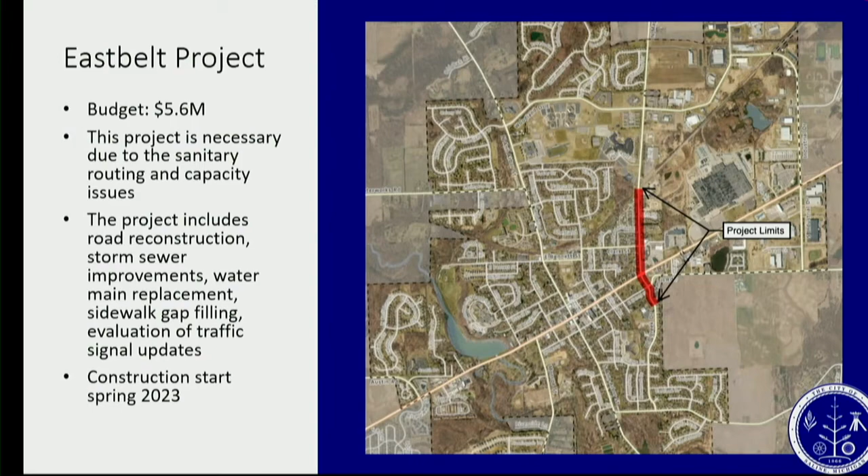The next project on the list is Clark Street, which is directly adjacent to this. Maple and Clark intersect; Maple's north-south, Clark east-west. Clark Street is a project for which we have received about $500,000 in funding, or a little more, from the federal government. And so we're coordinating this. We just started design on this one. This one just impacts a lot of residents. There's a lot of residents that live along Clark Street between Maple and Harris.

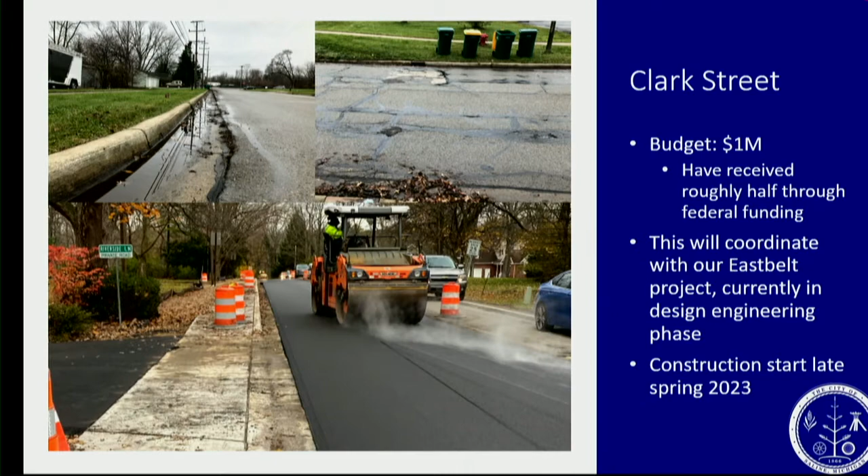Next on the list, and this is one that's actually starting this summer. This is ultimately a storm sewer project that we're doing to reroute some storm and address capacity and condition issues. This is located very near Pleasant Ridge Elementary and will be starting right after school ends in June of this year. We're installing 42-inch storm pipe south along Harris Street and then west along Pleasant Ridge over to Ann Arbor. So this is the route.

This will impact traffic locally. There will be one-way traffic throughout the duration of this construction. We will be hosting a project-specific meeting about this, more specific to this neighborhood, in the coming months because we're getting ready for construction to start here in June.

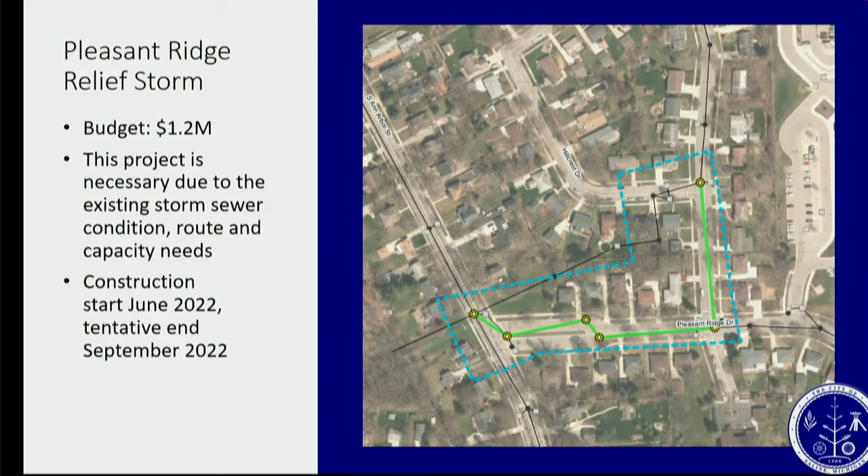Well, just in time to discuss the water clarity topics. There are numerous specific activities ongoing under our broader water clarity initiative. We'll have Director Searles weigh in. Well, since it's on the screen, we'll talk first about the water main lining job on Michigan Avenue. They've taken the old main out of service. They're going to clean the inside up and put a poly liner in that's going to prevent tuberculation.

We also have the valve assessment program coming, where they're going to touch all the valves in the city, give us a condition assessment, and also help us locate anything that we don't have mapped. That's going to be done using a technology platform so that we're getting actual GPS coordinates on all of our valves going forward. That'll help us keep a continual valve turning program going.

We have the water meter program coming, which will put new meters in the houses, but also allow us to keep up-to-the-minute reads, which will help us identify leaks and any issues in the house. The residents can have their own dashboard and control the water from their portable device or desktop, whichever they prefer. The big key for water clarity is it has a communications module.

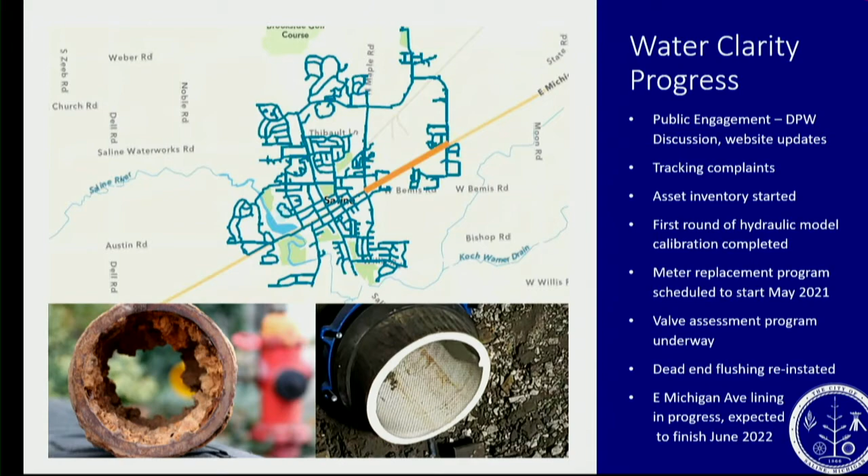On the screen is the map for the initial joint crack sealing efforts for this year. So they price by pound of material, so there may be more added to the map. The joint sealing helps keep moisture out from under the asphalt. The moisture is what hurts us in the freeze-thaw cycle, causing potholes. We're gonna continue this program going forward, well, perpetually. It's just a good, low-cost maintenance to prolong the life of the asphalt.

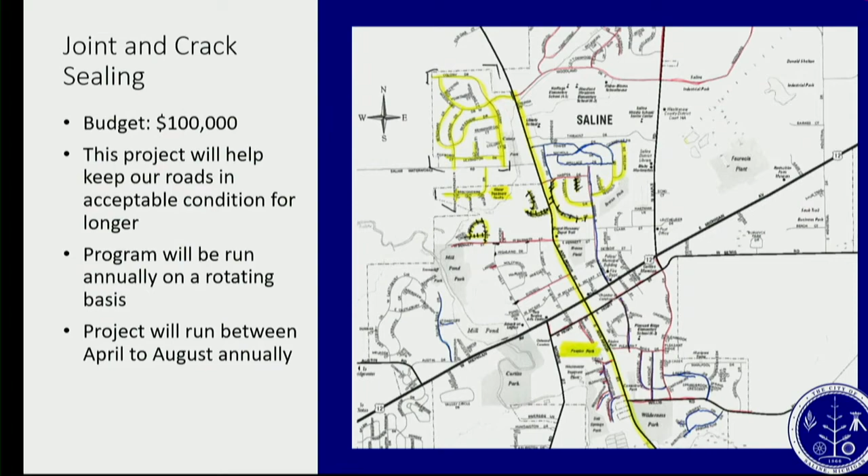I guess I'll talk about this one. This is a larger project that's necessary for the maintenance of our collection system. We have 7 pump stations throughout our project, and a majority of this project is mechanical upgrades primarily at 2 of our major pump stations. But we're also touching, as the screen shows, numerous sites remotely located in our collection and distribution system.

We're doing electrical upgrades, SCADA, which stands for Supervisory Control and Data Acquisition, upgrades at numerous stations throughout the site, just so we can communicate. So as far as the public's concern, you will see work at these sites. The biggest will be at the Maplewood Pump Station site, which is at Maple, just north of Woodland, and on Woodland Drive, near Industrial, just south of Industrial, is where the largest work is.

We're going to be replacing this wet well. So that work will be starting this fall. And there is a link to this on our website for more information. We're just starting this project up, doing submittals and such.

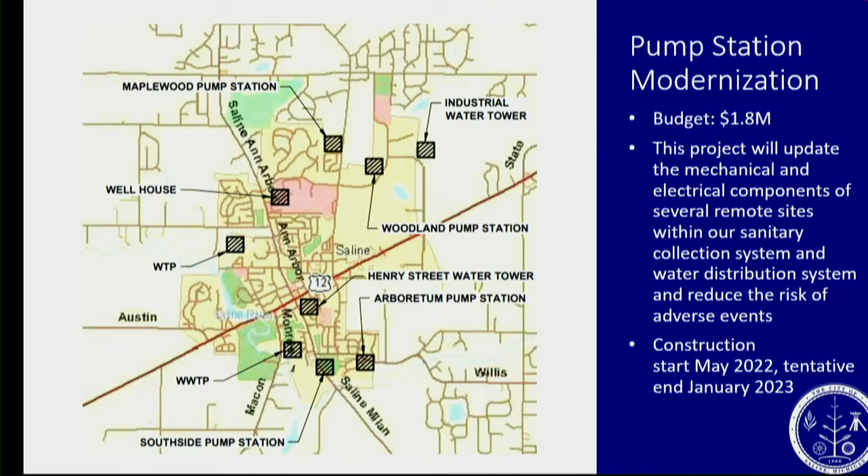I'm really excited to talk about this project. This is a project that has been kind of in the thought process for the past few years, and we've been working hard to get the funding in order to do this. This is a project that would create a walkway from the parking lot at Mill Pond, like where the pavilions are, all the way out south to Michigan Ave.

So creating a lot of new access to the park, especially for those that have mobility issues, they can walk the park, get out to the dog park, and get all the way out to Michigan Ave, providing some access to the water, some kayak launch, some overlooks for viewing, observation, for fishing, and things like that.

We did the design and engineering from a grant from Washtenaw County, the Connecting Communities grant. Mannik Smith Group actually did all the design work and engineering. And we have already secured a $200,000 grant from Washtenaw County Connecting Communities grant for construction. We have applied for a DNR grant through the Recreation Passport grant. Unfortunately, we were denied that, but we're going to continue to knock on the door again.

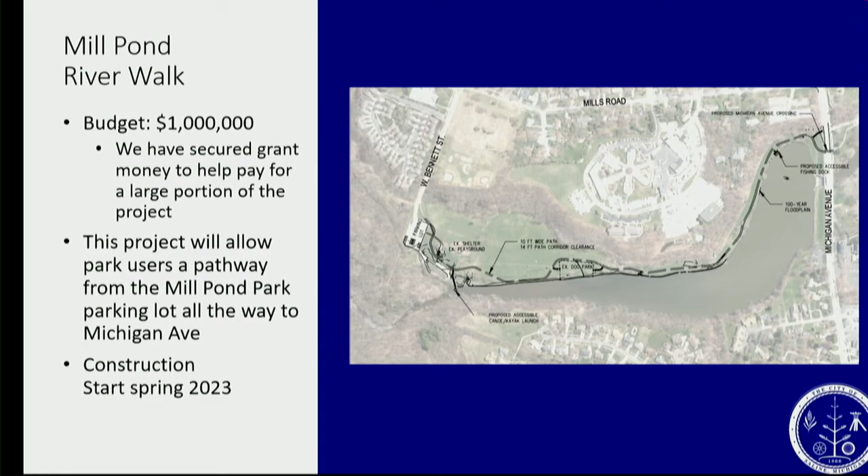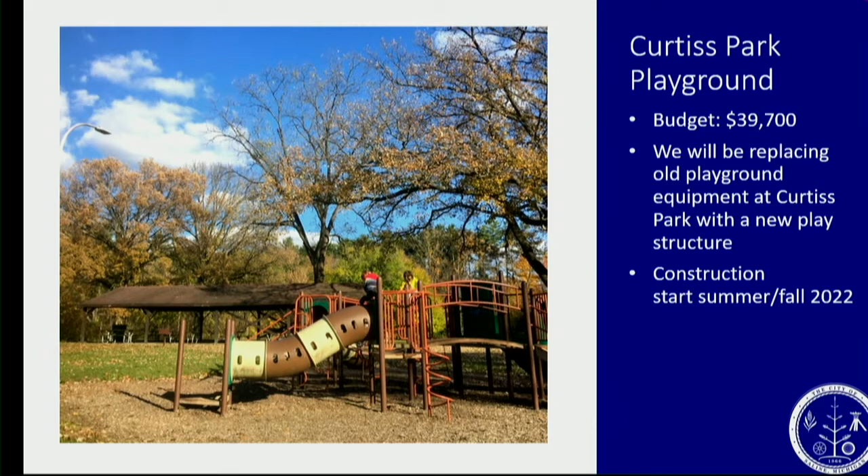This is another exciting project. So in 1999, the Reddy's Foundation, which is a local foundation, granted us money to install this play structure. It's very old. It's starting to deteriorate. So we have already gotten approval to replace this, and we have already ordered a replacement. It's going to fit in the same footprint, that same age range, which is a 5 to 12-year-old climbing structure. And we appreciate the Reddy's Foundation for providing that originally, but it's time for us to replace that. So we're just waiting for delivery, and we'll get that installed as soon as it gets here.

Good morning. So the wastewater treatment plant upgrades, which I'm sure you've heard some conversations about in the past, we are looking at rehabilitating many existing processes and some failing processes at the wastewater treatment plant, to bring them up to what we need to just maintain what's going on in the city right now. Of course, we do have an administrative consent order that's pushing this pretty hard too. So it's not something we can just walk away from. This is something that needs to be done.

That's an excellent question, Joan. Let me add this because I failed to mention it earlier. So I'll give you a little bit of the backstory here. It was actually Senator Gary Peters' office who contacted my office probably about a month ago now, indicating that his staff was soliciting projects from local municipalities. And the funding source is President Biden's new infrastructure statute.

And so what was communicated to us via Senator Peters' office is that this first round of funding will be actually written into the federal appropriation bill. Subsequent to that, most of the dollars will be turned over to individual states. So the point being is we've applied for 18 million through the federal government. We will have a second bite at the apple for additional funding, not just for our wastewater treatment plant, but for roads and for dams and bridges and for non-motorized pathways once those dollars are allocated and earmarked to each of the states, including the state of Michigan.

Let me defer back to Sarah. Sarah, any questions or comments online? There are none. Additional questions or comments from those in the audience this morning? Mayor, I'd like to make one comment.

Please. As we talk about additional support and that type of thing, we are eligible for the state revolving loan fund, which is a lower rate type of interest. And then we're also eligible for potentially other grants if we can get ourselves to be qualified for them. Unfortunately, because of our median income and some other aspects, we are not available for those, but we can hope that maybe we can come about from another angle and potentially get more funds in. So we're not going to close the door on any source, but fortunately we are eligible for some low interest loans so we wouldn't have to go out to the public market and necessarily get a higher rate.